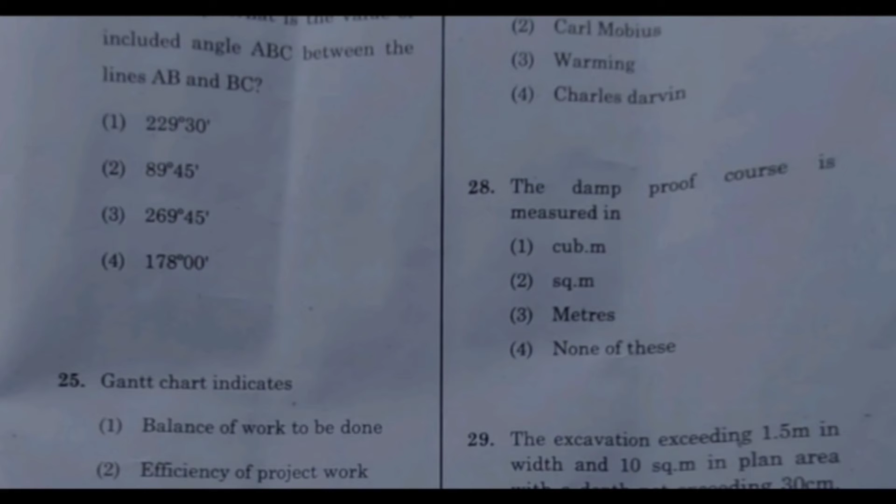Question number 28. The damp proof course (DPC) is measured in meter square, and cornice is measured in running meter. Earthwork excavation, foundation bed concrete, and main brick wall are measured in cubic meter, while plastering, painting and flooring are measured in meter square. So the answer for question 28 is option 2.

Question number 29. Excavation exceeding 1.5 meter in width and 10 square meter in plan area with a depth not exceeding 30 centimeter is termed as what? For earthwork excavation, we take maximum lead up to 30 meter and lift up to 1.5 meter. In this question, 1.5 meter is the width, which is less than the lead, so this kind of excavation is called surface excavation. Hence option 4 is the correct answer for question 29.

Question number 30. What is the weight of the tracked vehicle considered in IRC Class 70R loading? That is 700 kilonewton. This is a direct question from highway engineering.

Question number 31. As per IS code 8112-1976, the initial setting time of ordinary Portland cement should not be less than what value? This is a very simple and most repeated question in every examination. The initial setting time of cement is 30 minutes, and this is determined using the Vicat apparatus. So option 3 is correct.

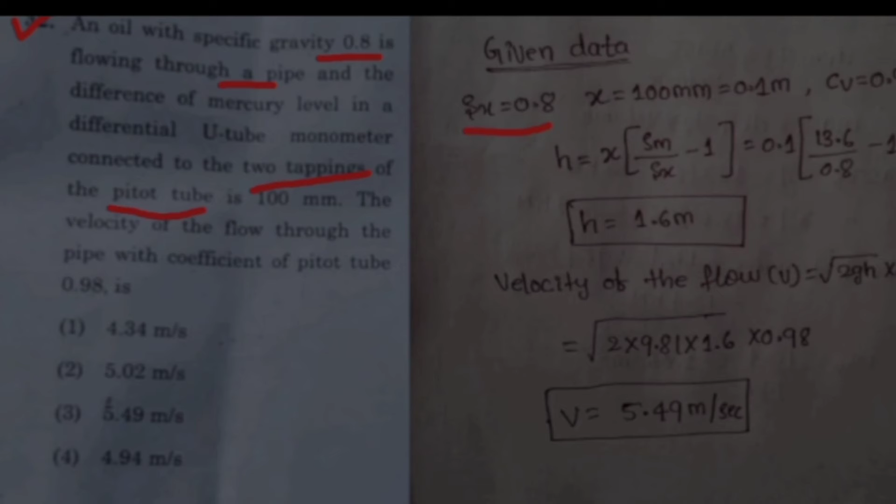Question number 32. An oil with specific gravity 0.8 is flowing through a pipe, and the difference of mercury level in a differential U-tube manometer connected to the two tappings of the pitot tube is 100 mm. So x equals 100 mm, convert it into meter, that is 0.1 meter. The velocity of flow through the pipe with the coefficient of the pitot tube is 0.98, that is Cv equal to 0.98.

We need to find the head of water, H equal to x into density of mercury upon density of oil minus 1. Put the value of x, that is 0.1. The density of mercury is constant, that is 13.6, and the specific gravity of oil given is 0.8. Simplify this, and you will get head equal to 1.6 meter.

We know that velocity of flow v equals theoretical velocity into coefficient of velocity. The theoretical velocity is under root 2gh, where 2 into acceleration due to gravity is 9.81 and h is 1.6, multiplied by Cv, that is 0.98. Then you get velocity of flow v equal to 5.49 meter per second. So option 3 is correct.

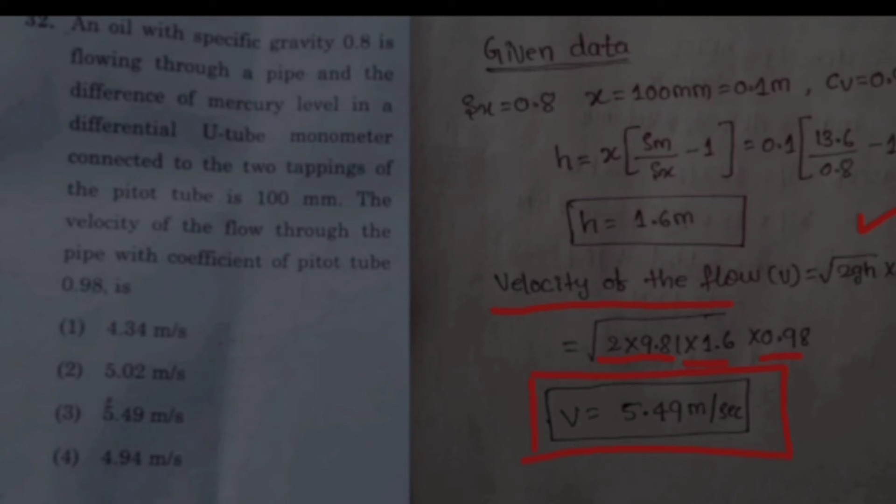Question number 33. Before going to the question, let us understand hyetograph, hydrograph, mass curve and isohyets. A hyetograph is the plot of intensity of rainfall against time. A hydrograph is a graphical plot of discharge of a natural river system versus time. A mass curve is the plot of accumulated inflow or outflow versus time. An isohyet is a form of map with contour lines displaying precipitation.

Now coming to the question, the plot between rainfall intensity versus time is called a hyetograph. So option 3 is the correct answer.

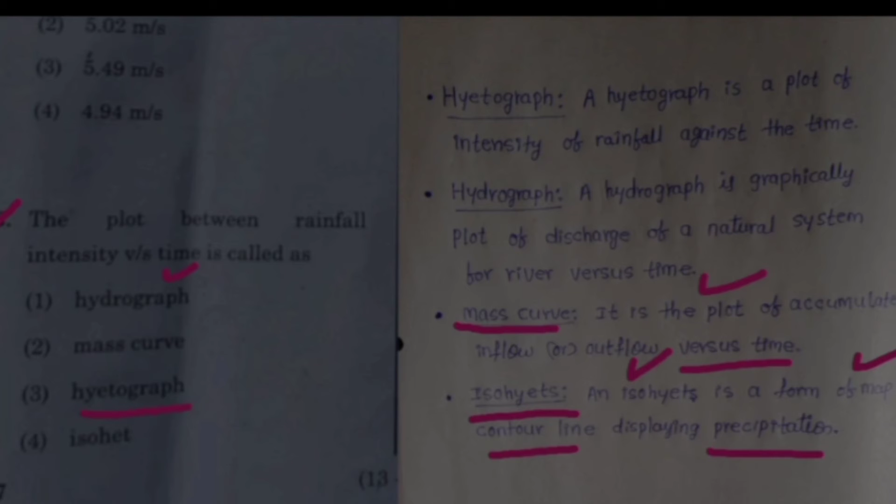Question number 34. The runoff from a drainage basin of area 4320 km square is estimated as 10,000 meter cube per day, meaning they gave the discharge runoff. We need to find the runoff depth, equal to volume by area. Volume is 10,000 and area is 4320, given in kilometer square, so convert it into meter square by multiplying by 10 raised to 6. Then you get 2.3148 into 10 raised to minus 6 meter per day.

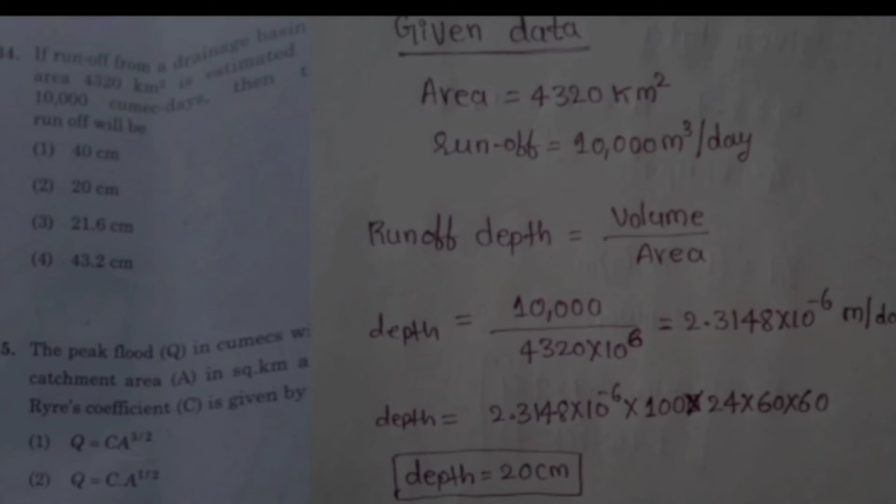We need to convert this into centimeter per second. For converting meter to centimeter, multiply by 100. For converting day to second, multiply by 24 into 60 into 60. Then you get runoff depth equal to 20 centimeter, so option 2 is correct.

Question number 35. Peak flood Q in cumecs with catchment area A and Ryves coefficient C is given by the Ryves formula of 1884: QP equal to CR into A raised to 2 by 3, where CR is the Ryves coefficient. Out of these 4 equations, option 3 is correct, that is Q equal to C into A raised to 2 by 3.

Question number 36. A rectangular section has width b and depth d. Its moment of inertia about its centroidal axis is to be found. This question is from strength of materials. The moment of inertia I for a rectangular section is bd cube by 12. So option 3 is the correct answer.

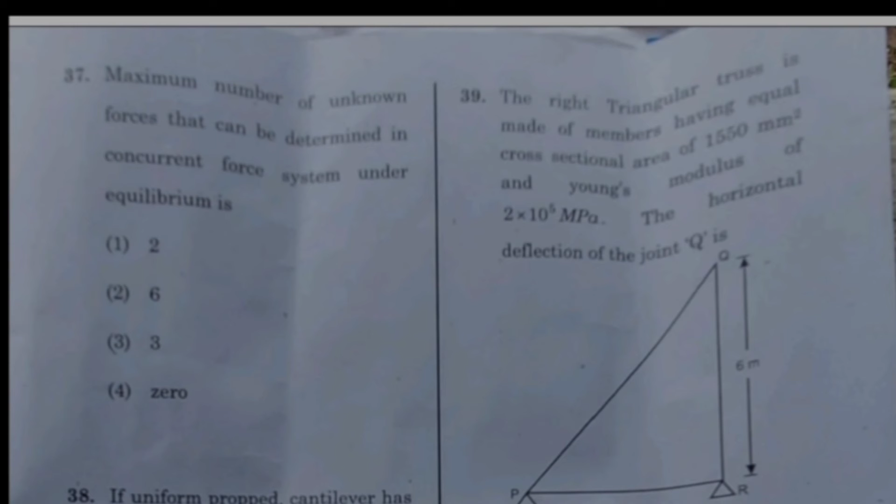Question number 37. The maximum number of unknown forces that can be determined in a concurrent force system under equilibrium is only 2. By the equilibrium equations we can find only 2 unknown forces. Hence option 1 is correct.

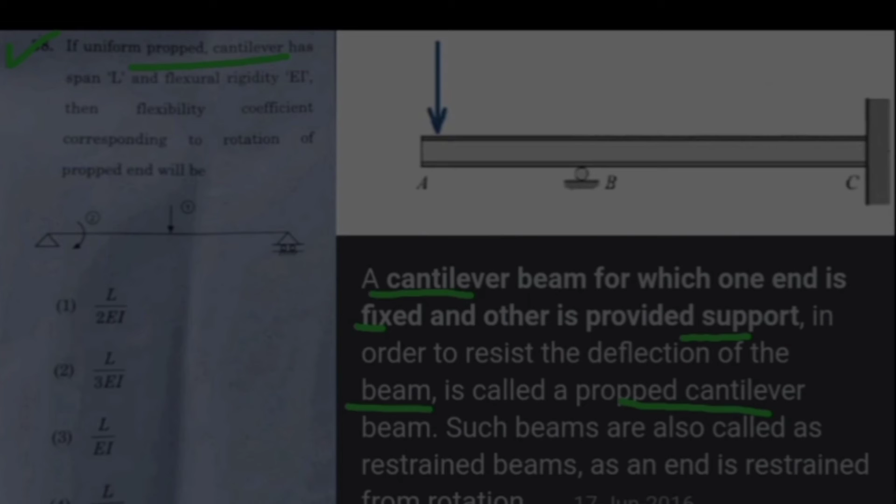Question number 38. Before solving this question, let's understand what a propped cantilever beam is. It is a cantilever beam for which one end is fixed and the other end is provided support to resist deflection of the beam. This means one end should be fixed and the other end should have at least one support. There is no fixed support in the given figure, so the question is not proper. Maybe you will get grace marks for this question.

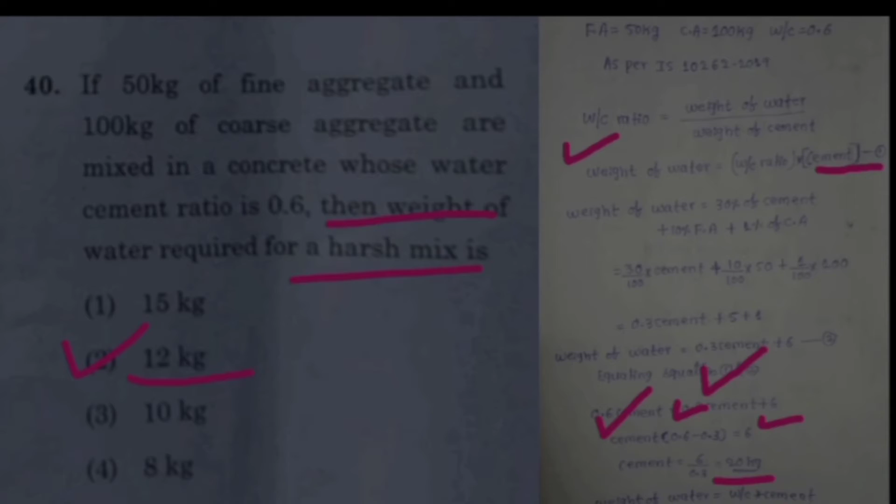Question 41. Pre-tensioning is the process of tensioning tendons in fresh concrete, suitable for small works like railway sleepers, electrical poles, and precast units like beams, columns, and slabs. Post-tensioning is done for hardened concrete and is suitable for large works like box culverts, bridges, and tunnels.

Coming to the question: which method is employed to manufacture pre-stressed concrete sleepers? As I mentioned, railway sleepers come under pre-tensioning, hence option 1 is the correct answer for question 41.

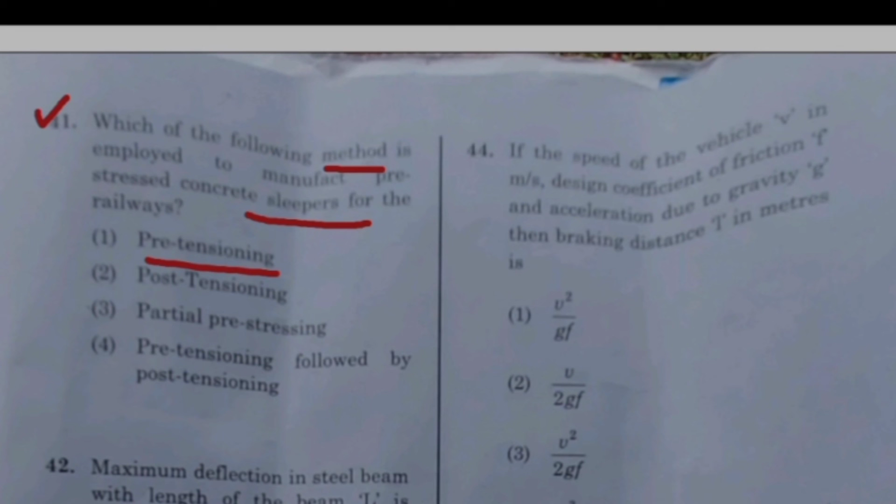Question 42. As per IS 800 code provision, maximum deflection in a steel beam of length L is limited to L by 325. Refer IS 800 table 6. Hence option 1 is correct.

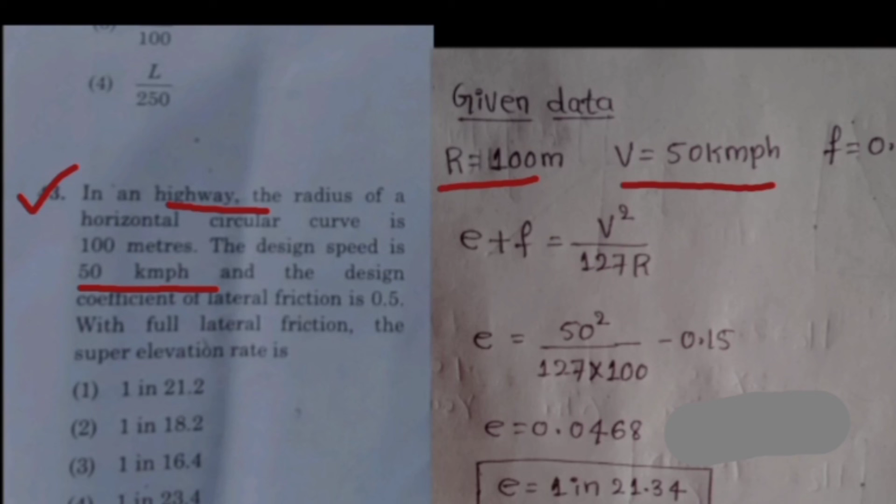Question 43. In a highway, the radius of the horizontal circular curve is 100 meters, so r equals 100 meter. The design speed is 50 km per hour, so v equals 50 kmph. Coefficient of lateral friction should not be greater than 0.15 — please make a correction, so take f equal to 0.15.

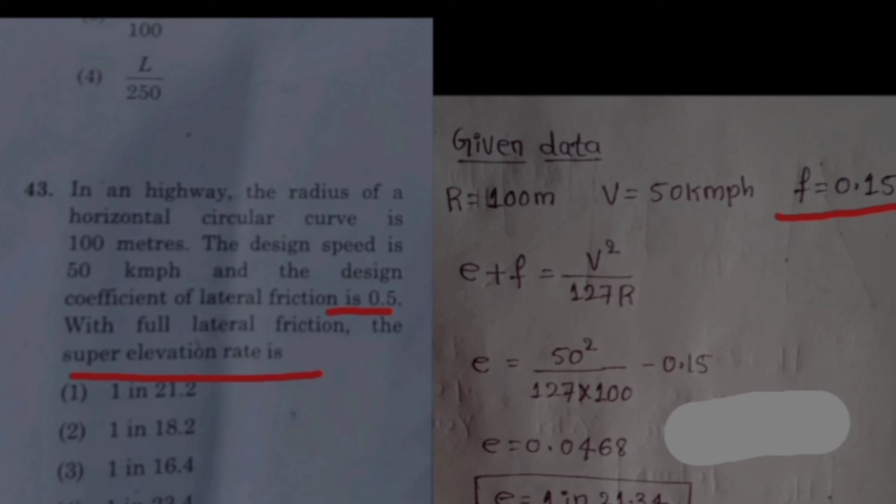They ask to determine the super elevation. We know the formula for a horizontal circular curve: E plus F equals V square upon 127R. Given design speed V equals 50, radius R equals 100, take F to the right hand side (becomes minus F), and put f equal to 0.15. Simplifying, you get E equal to 0.0468.

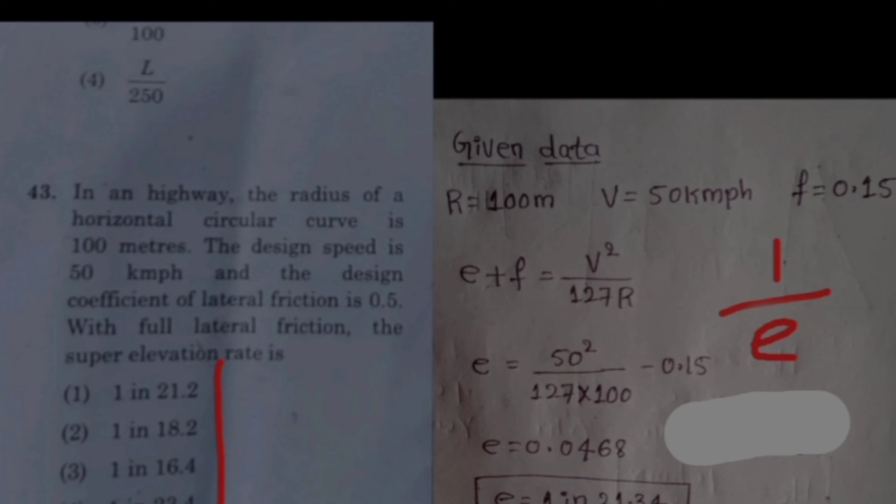Since they ask for super elevation in terms of gradient, press 1 by E in the calculator. Super elevation in terms of gradient is 1 in 21.34. So option 1 is the correct answer.

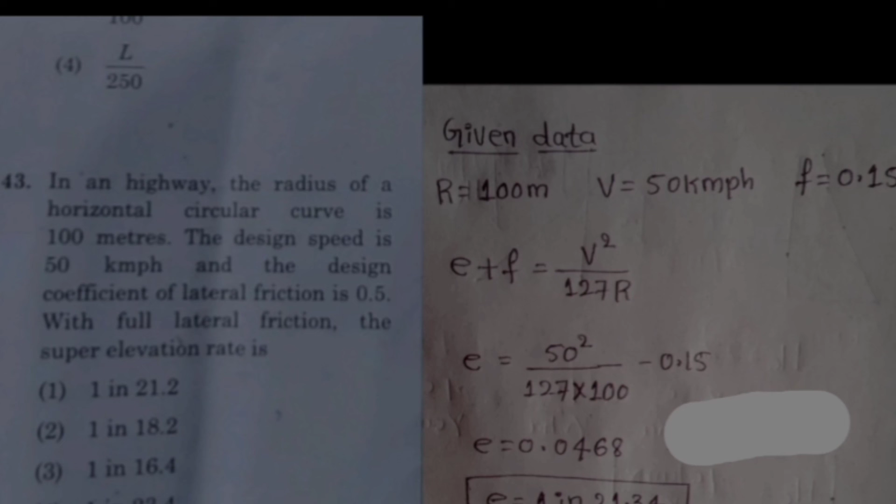Question 44. If the speed of the vehicle v is in meter per second, design coefficient of friction f, and acceleration due to gravity g, find the braking distance L in meters. We know stopping sight distance equals lag distance plus braking distance. Lag distance is v into t, and braking distance is v square upon 2gf. They ask only for braking distance, that is v square upon 2gf, hence option 3 is the correct answer.

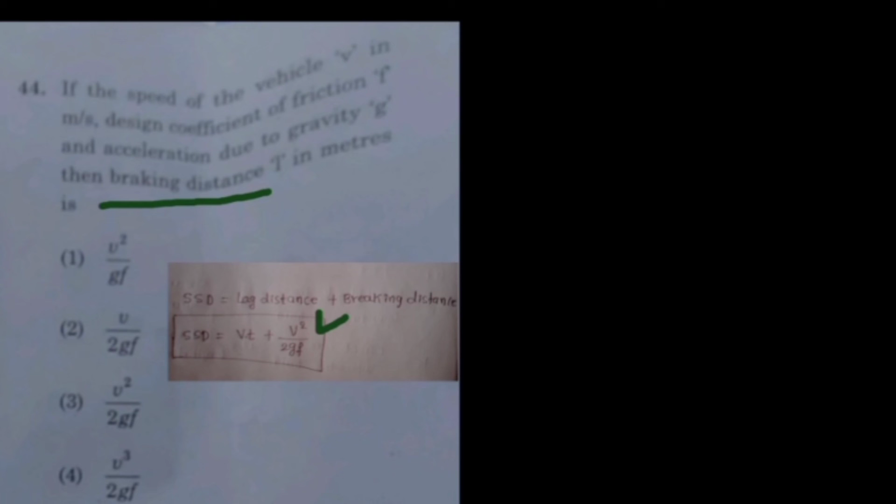Question 45. The World Environment Day is on — a very simple question, that is 5th June. So option 2 is correct.

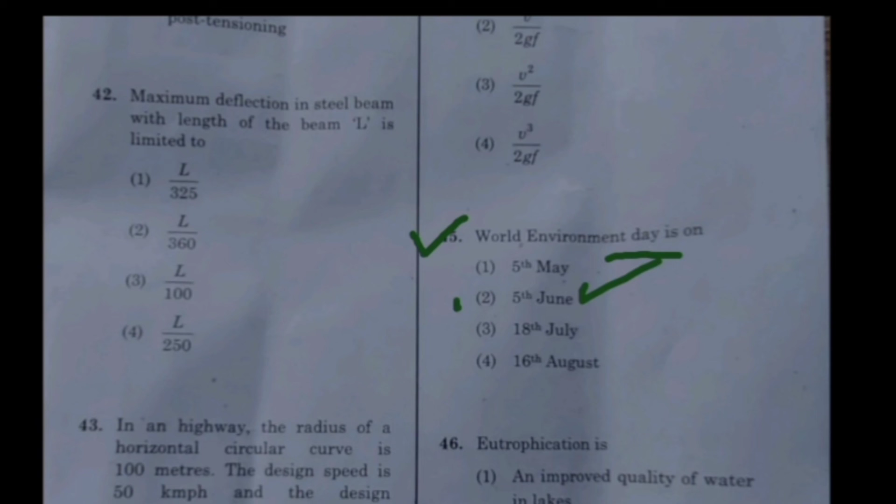Question 46. Eutrophication is the result of accumulation of plant nutrients in water bodies. It is also a direct question. Option 3 is correct.

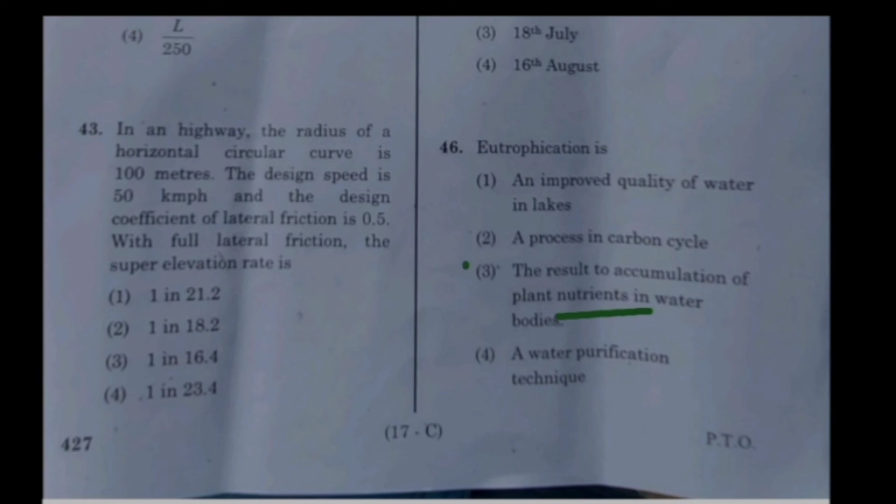Question 47. Intake wells are provided to collect water from surface sources. An intake is a structure constructed on the bank of surface water sources to receive water and discharge it to the field. Hence option 3 is the correct answer.

Question 48. If the sewage is fully oxidized, then the nitrogen is in the form of nitrates. It is also a direct question. Option 1 is correct.

Question 49. The maximum quantity of water that can be guaranteed from the reservoir during a critical dry period is known as safe yield. It is also a direct question.

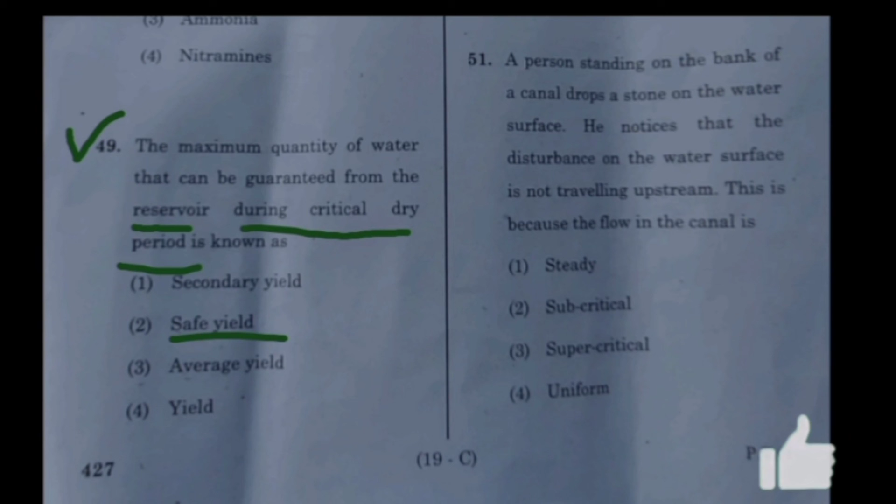So option 4 is matching this relation. Hence option 4 is the correct answer for this last question.